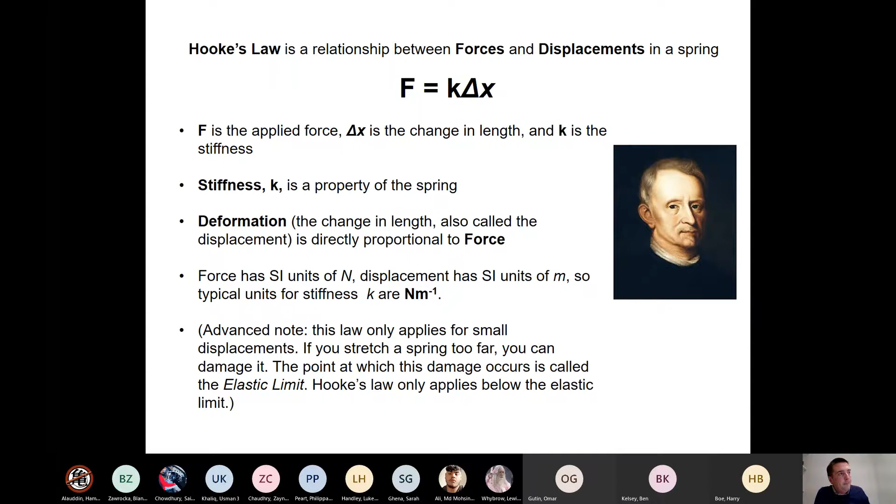So what does that actually mean? This is a slightly clunky slide visually, I acknowledge, but the idea is for every extra weight that you hang off a spring, you'll get the same amount of extension again. So when we move to W, 2W and 3W hanging off the spring, we move to delta X, 2 times delta X, and 3 times delta X extension. And that gives you a nice straight line on a graph. And in fact, the slope of that straight line can tell you the stiffness of the spring. So that's one way we can get the stiffness of the spring.

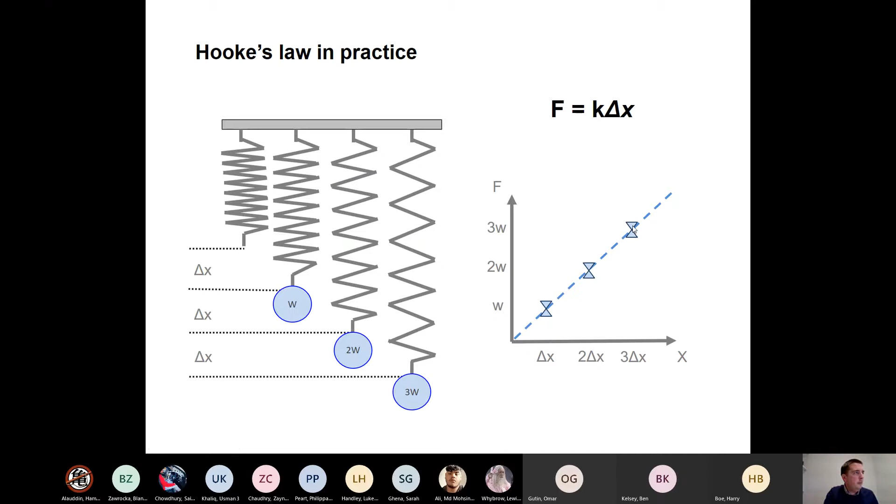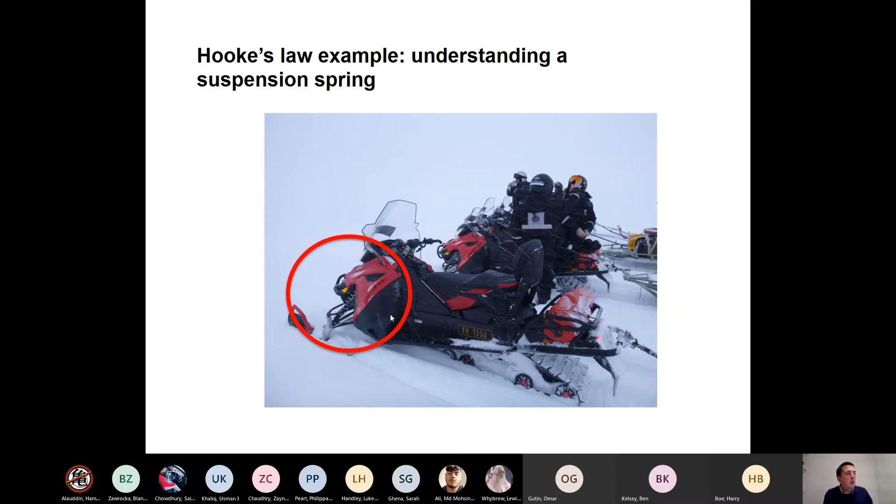So here is an example. If you look at many vehicles, they'll have springs somewhere in their suspension. This is a coil spring here with a kind of helical shape, just like we've been talking about. And as you sit on the snow scooter here or on a motorbike, or as you get into a car, those springs will compress a bit because your weight adds to the force on the spring. And we know now that the force is proportional to the change in length. So when you add some force, you're going to get a change in length.

So here is an example. And what I'm going to do is give everyone 3 minutes, let's make it 4 minutes, just to write out or have a go at answering this question. I'll just make sure I've got my camera set up so that we can look at how to answer it in 4 minutes' time.

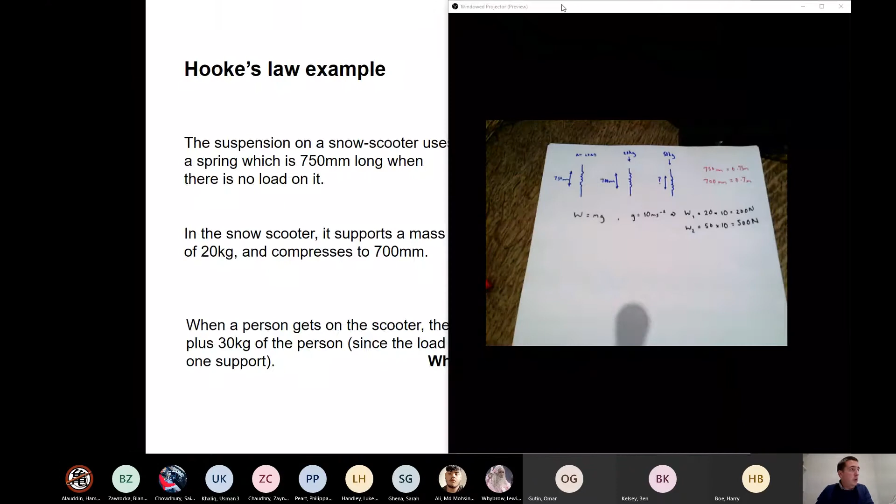Let's just work through the maths of that so everyone can make sure that we're happy. I'm going to see if I can do a split screen on this with that one and that page. I guess we'll just leave it like that. And I hope everyone can see on the right-hand side my working. Sorry, the camera, there's a light directly above, so it's casting a shadow on the page.

But I guess we'll be able to work with that. So what I've done is try and draw out a fairly simple diagram of no load: the spring is 750 millimeters long. When we've got 20 kilograms, the spring is 700 millimeters long. And when we've got 50 kilograms, we don't know what the length is, and that's the question. Just because I always do these things, I've converted millimeters into meters, and also I've taken the masses and used weight equals mass times gravity to give me a weight, which is a force.

So converting millimeters into meters, you don't have to do that. You could just work through the whole question in millimeters, but I always like to convert everything into SI units where possible. This bit you do kind of have to do, or you should do, because we're going to use Hooke's law, which is about forces, and it says that force is K times delta X.

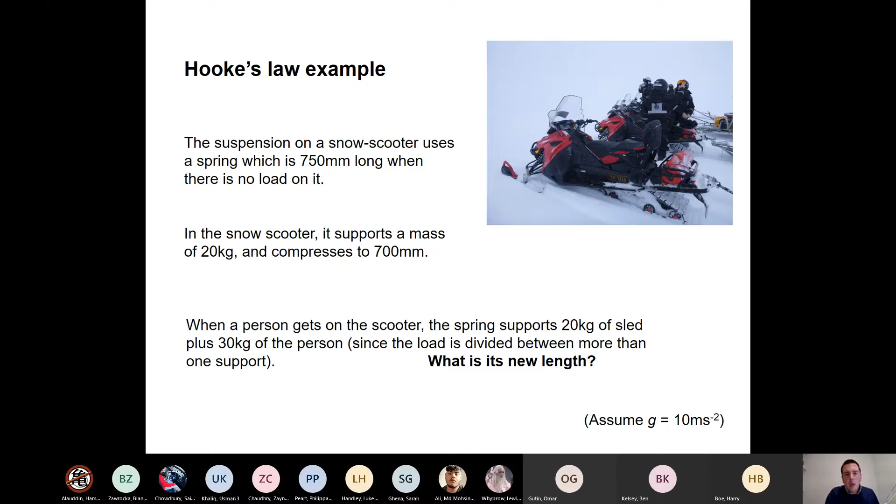What we can do next is go on and take that further. You may have been thinking, and certainly when I was at your level I thought, that's fine, but there just aren't that many springs in the world. Learning the specific way that springs work isn't going to tell me that much about engineering. But the reason it's in this particular lecture is because if you look at it in the right way, everything looks like a spring. That's what we're going to go on to now.

And instead of understanding using F equals K delta X, Hooke's law, we're going to understand it using these tools of stress and strain.

So again, I think this is something everybody intuitively understands, but it's worth stating it and being clear on it. A compressive force is a force that does some kind of squashing, so it makes an object shorter along the axis you're applying the force, and a tensile force makes an object longer. So this is a compressive force in the middle, and this is a tensile force on the right-hand side. Obviously, mostly we don't see things change their shape this dramatically. If this is made of concrete or steel, it would be a tiny amount that it compressed or extended, but nevertheless, it would compress or extend.

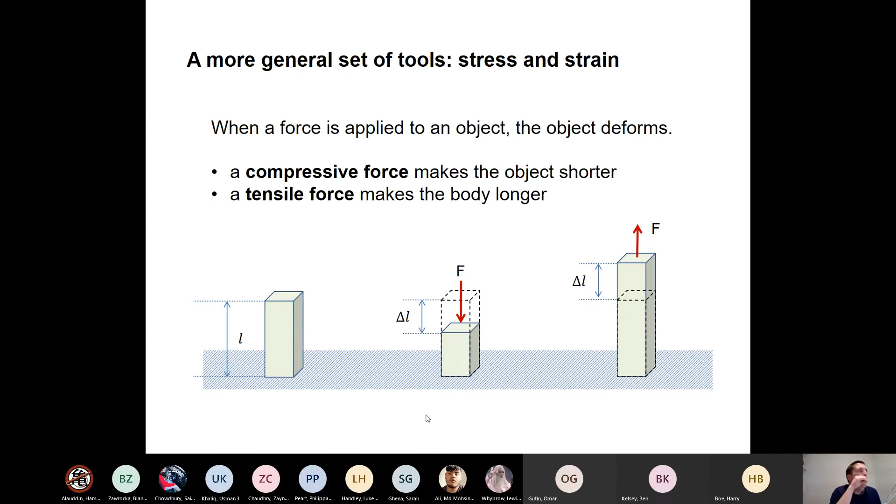So what we're going to work on in this lecture are things called direct forces. That's where we're compressing something in the obvious way along its axis. I've got some candles here which won't really compress, but what we're talking about is compressing it along its length. What I'm not going to do is any kind of bending, twisting, or applying a shear force across its length. Everything will be along the long axis of the objects we're looking at. Later on, we'll extend that to bending and twisting and other things, but for now, the most standard way of looking at something is this kind of direct force.

And what we're going to do is define this new concept that I've talked about a lot, and now we have a definition for: stress is force divided by area. Stress here is the Greek letter sigma, a lowercase sigma. F is force, which we know about already, and A is area. And what we mean is the cross-sectional area.

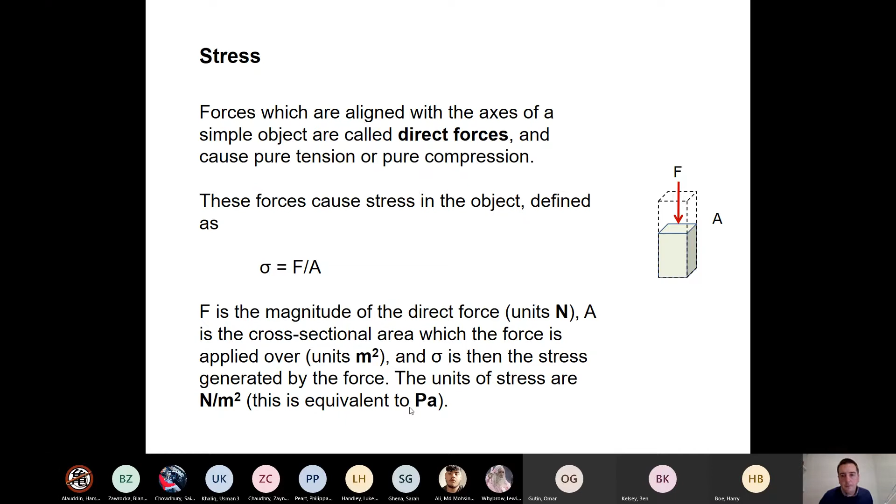So let's do an example. I'll give everyone another 3 minutes to have a look at this and think about it.

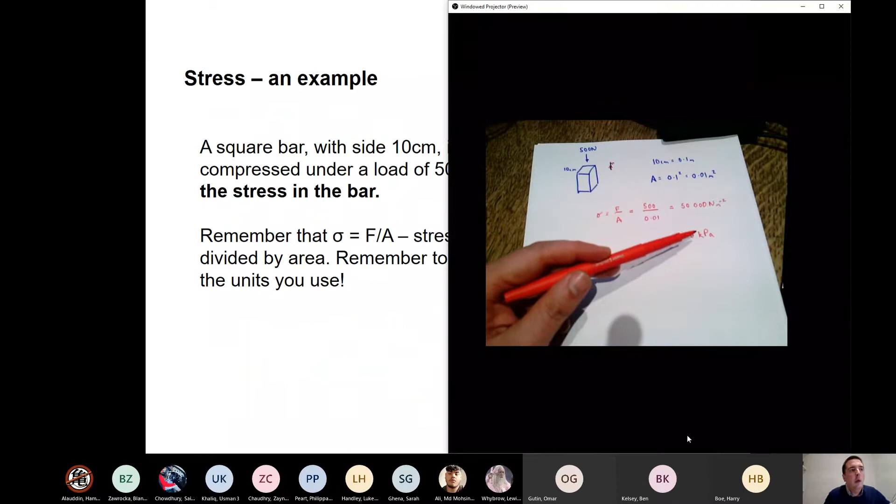Okay, all we do now is write out the equation we've seen on the last couple of slides, that stress is force over area, which here is going to be 500 divided by 0.01 square meters, and that comes out to be 50,000 newtons per square meter, which is exactly, as Luke said, 50 kilopascals. The kilo here is obviously multiplied by 1,000, just like 50 kilograms is 50,000 grams. That's the same kind of thing.

That's how stress calculations work. It won't get any more complicated than that this year, but what you'll find is you have to remember how to do that in the middle of doing other things. So although it seems fairly straightforward when you calculate the stress on its own, when you've got 3 or 4 calculations and one of them is to calculate the stress, you just need to remember to stick to the program: stress is force over area, and calculate through.

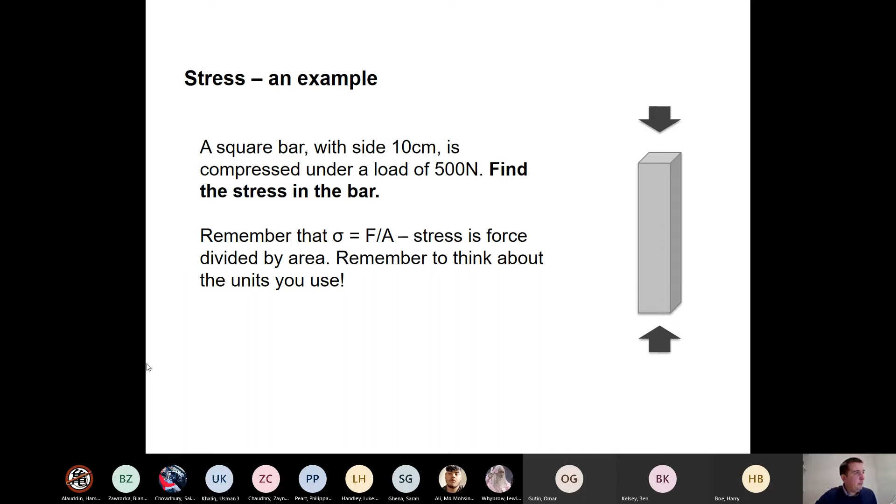I won't get you to go through this example now, but the idea here is to introduce this concept of yield strength, and that means the stress at which something will break, or it'll no longer behave in the same way. You can think of it as the point at which something's going to break, and that is a material property. So for steel, we can just say the yield strength is 250 megapascals.

What we're really saying there is incredibly versatile. We're saying as long as the stress is less, it's not going to break. And if the stress is higher than this number, it will break. And that's all we need to know. We've already accounted for the force and the dimensions, the scale of the thing, so we'll know whether something's going to break or not.

So let me very quickly work through this problem to show you the kind of thing I'd be doing. So we've got, I'll just write down the details. I'll call that W, hanging off a circular steel bar, and the steel bar has some diameter D that we don't know yet, and it's holding up 5,000 kilograms, 5 tons, and we know the yield stress.

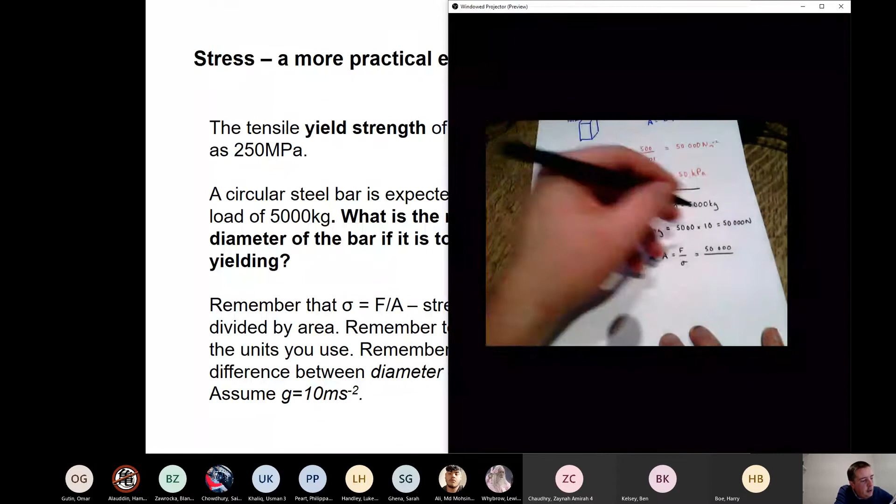And then that's going to be, we know the force is 50,000, and the stress we're interested in — well, if we just find the point at which it's just breaking, the stress is 250 megapascals, then we'll know the smallest possible diameter we can get away with. We might say, okay, let's double that diameter so we're not just at the point of breaking. But as long as we know what the limiting diameter is, we can work from there. So I'm going to put down 250 times 10 to the 6 as the stress.

And that equals, and again, this is just a calculator job. And as always, I'll keep saying over and over, do make sure you're practicing this calculator work. It's sometimes more complicated than people expect, and it comes with practice. So that's 2 times 10 to the minus 4 square meters, which is the minimum area that will support that load.

Then we need to say, okay, pi r squared — it's a circle, so the area is pi r squared — and that must be what makes up the 2 times 10 to the minus 4 square meters. Again, I'm going to go a bit quick here, but you can practice this rearranging in your own time, so that r must be 2 times 10 to the minus 4 divided by pi, all square rooted. And that's something I can put into a calculator, and that comes out to be 7.98 times 10 to the minus 3 meters.

And then finally, I have to remember that the question was actually asking for a diameter d, and d is 2 times r. And that comes out to be 16.0 times 10 to the minus 3 meters, and that's 16 millimeters, pretty close.

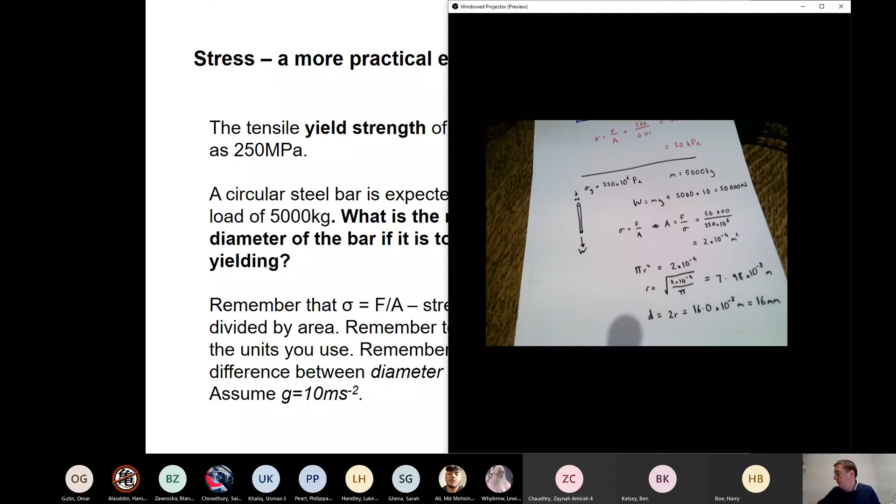So that's somewhere just smaller than the diameter of that pen I've been using — I would imagine that's about a 2 centimeter diameter. And this is a 1.6 centimeter diameter in the question, and it's able to hold up 5 tons. So it's kind of a reminder that steel has a high yield strength, and steel can support a lot of load, I suppose is what we're really learning.

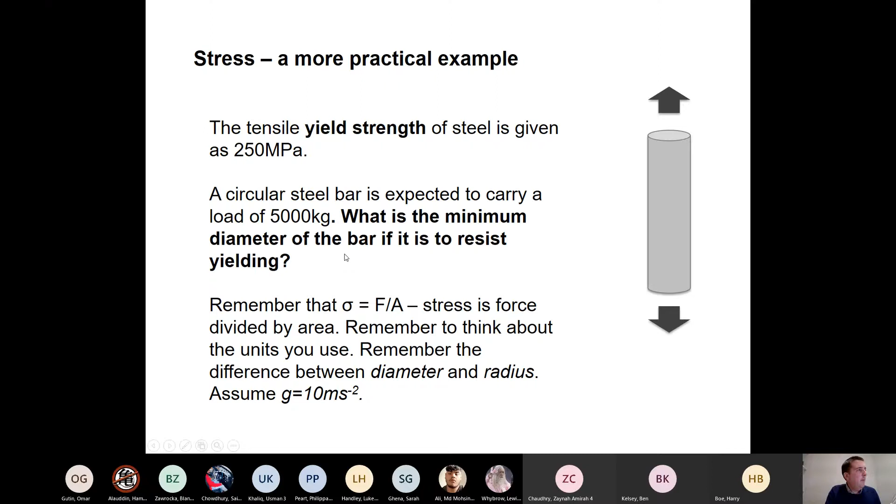One thing we'll come back and think about when we talk about fluid dynamics is pressure. And pressure has the same units as stress — it's also a force divided by an area. We tend to use pressure for something that's happening external to an object, and stress describes the internal state. They're very closely linked.

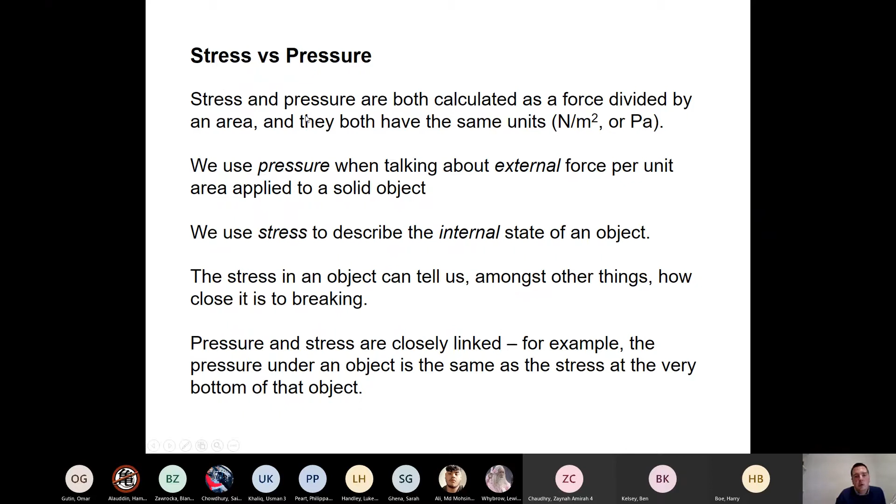So here's an example: the pressure under an object is the same as the stress at the very bottom of that object. The pressure under your foot is the same as the stress that the sole of your foot is experiencing. So I guess this slide is just a kind of side note — if you're confused by the distinction between stress and pressure, there's very little distinction between the two.

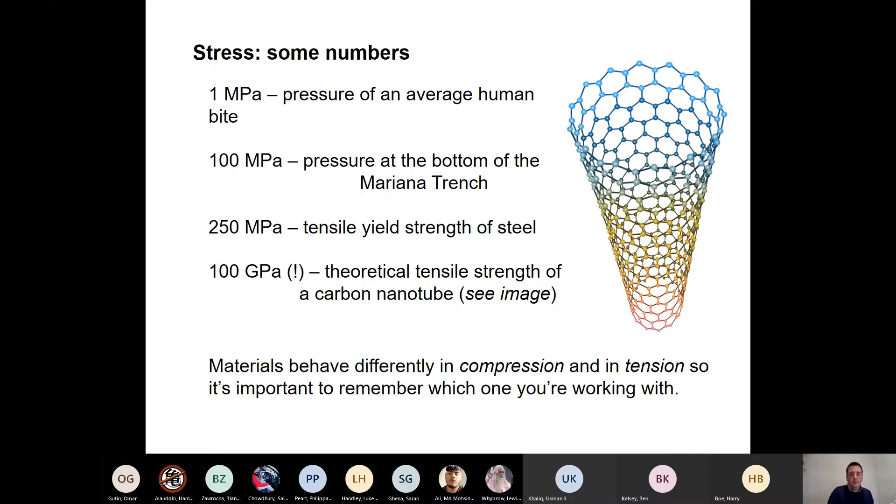So we've talked about stress. Now I want to talk about strain. When something has a stress, an internal stress, when it has a force applied to it, we've already said it changes length, and strain is a measure of that change in length. Specifically, it's delta x, the change in length, divided by x, the original length. This is a Greek letter epsilon - I'll put that in the chat as well. That's the lowercase epsilon.

We said already that stresses are typically very large numbers, strains are typically very small numbers. Things don't change their length very much at all. If I take the candle again and squash it really quite hard between my hands, it doesn't change length to any extent that we can visualize. So the strain is like 1 part in a million, or even with quite a large force, it would be 1 part in 1,000. We describe those as millistrains or microstrains.

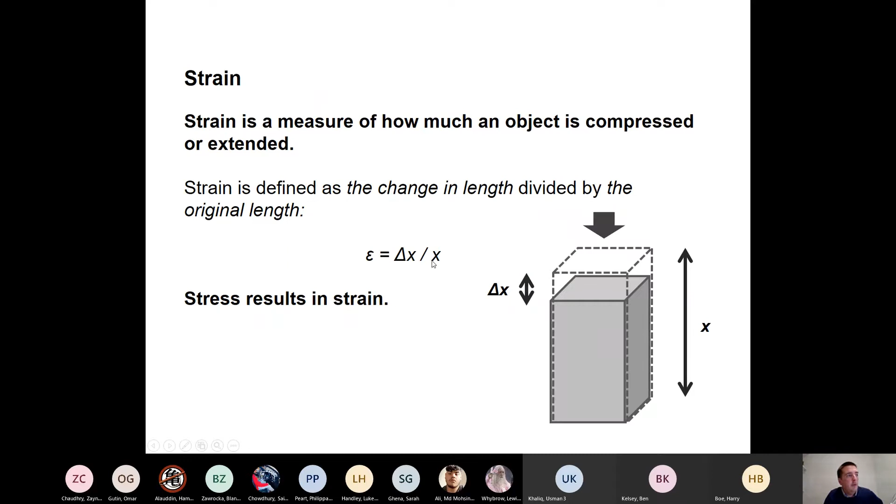The other important thing is that strain is a ratio of lengths, and it has no units. The change in length divided by the length is something in meters divided by something in meters, so it doesn't have any units in the end. We call that a dimensionless quantity. Just remember that strain is dimensionless.

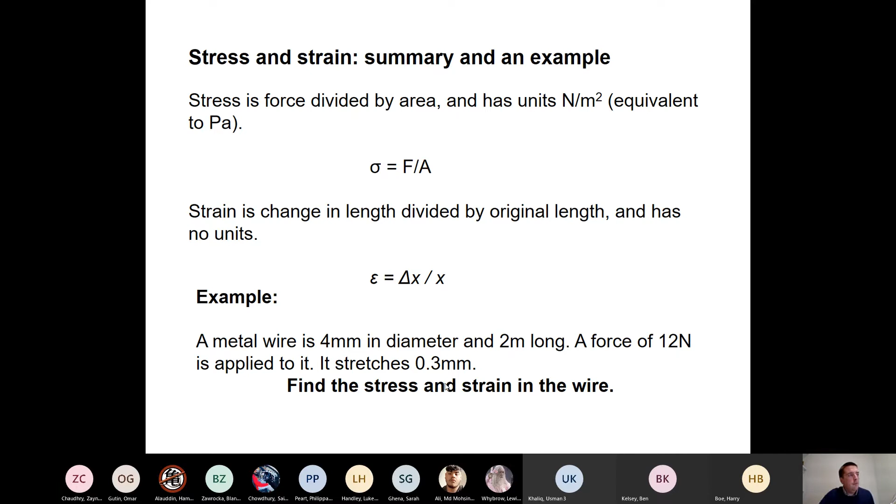So here is a kind of part-way summary. We've defined stress and we've defined strain. Again, you can do these kinds of questions about metal wires and find how much you expect something to stretch given a certain force, or how much strain there is given a certain amount of stretching. I'll leave that for people to have a go at later, because what I want to look at is this next slide, which is kind of where everything comes together.

We already said Hooke's law for springs has a force being related to a change in length. That extends to any material at all, not just springs, using stress and strain as our way of understanding things. So a stress is some constant times a strain. Remember, when you're comparing across these, stress is force over area, so it relates to force, and strain is change in length divided by the original length, so it relates here to this delta x. So there's a similarity between these two equations.

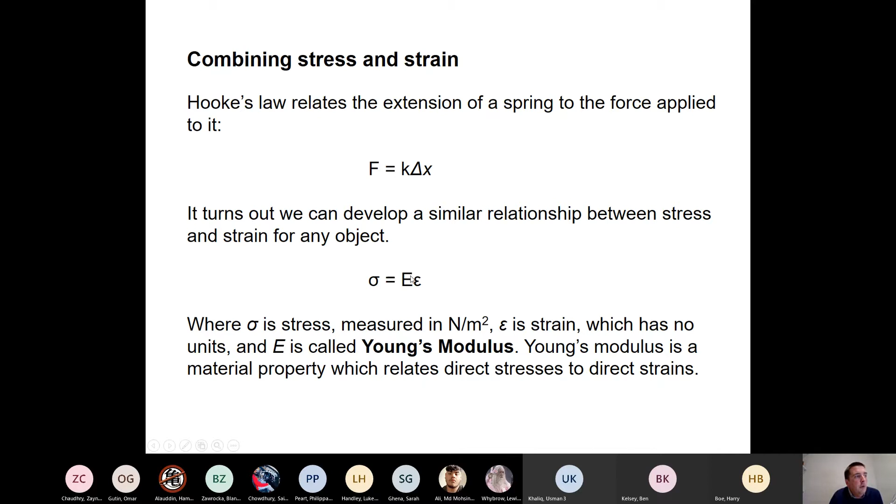The number that relates stress and strain is called Young's modulus, and it's a material property. So steel has a Young's modulus, aluminium has a Young's modulus, different woods have different Young's moduluses, for example. Because stress is measured in pascals, or newtons per square meter, and strain has no units, Young's modulus must also be in pascals, or newtons per square meter.

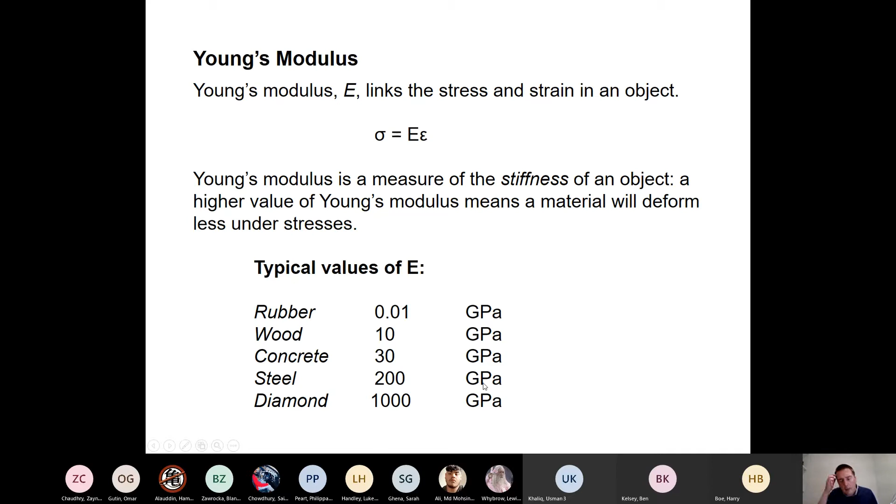Young's moduli are typically listed in gigapascals, or they're typically very large numbers, as you can see here, and they kind of relate to how hard you know something is. So rubber and spongy materials come out at, say, 0.01 gigapascals. The very hardest materials come out at hundreds or thousands of gigapascals as their Young's modulus.

Okay, so one last example in this lecture, and then we've really covered the important information. I'll give everyone 4 minutes to get started on this, and then we'll work our way through it.

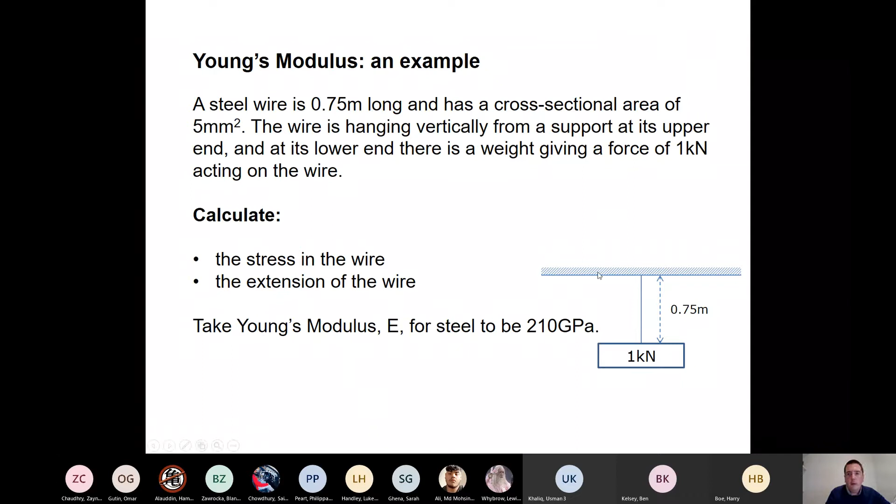One tricky thing about this question is working out what 5 square millimeters is in terms of square meters. 1 square millimeter is 1 millimeter multiplied by 1 millimeter, and you need to convert both of those millimeters into meters. When you multiply it through, you find that a square millimeter is 1 times 10 to the minus 6 square meters. That's something that can easily catch people out, it can easily catch me out too.

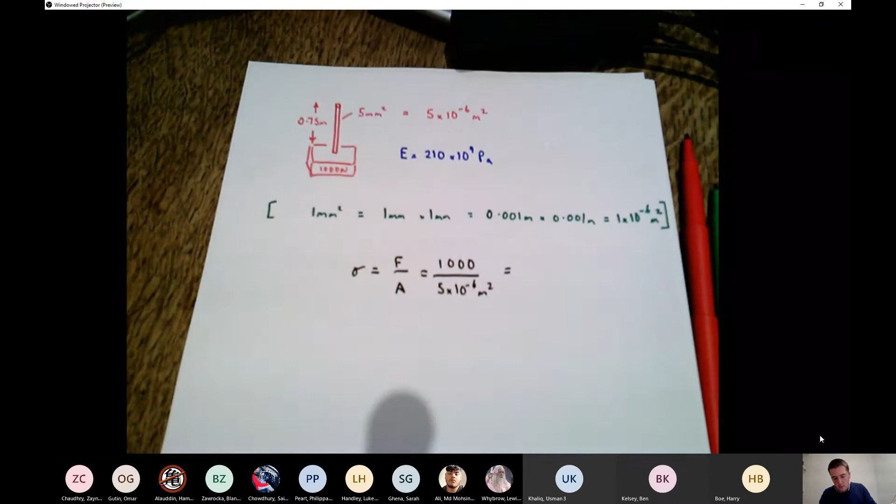So just keep that in the back of your mind for now. Now in the problem, we know a force and we know a cross-sectional area, so we can calculate the stress in the wire: force over area is 1,000 newtons divided by 5 times 10 to the minus 6 square meters, which is 200 times 10 to the 6 pascals, or 200 megapascals.

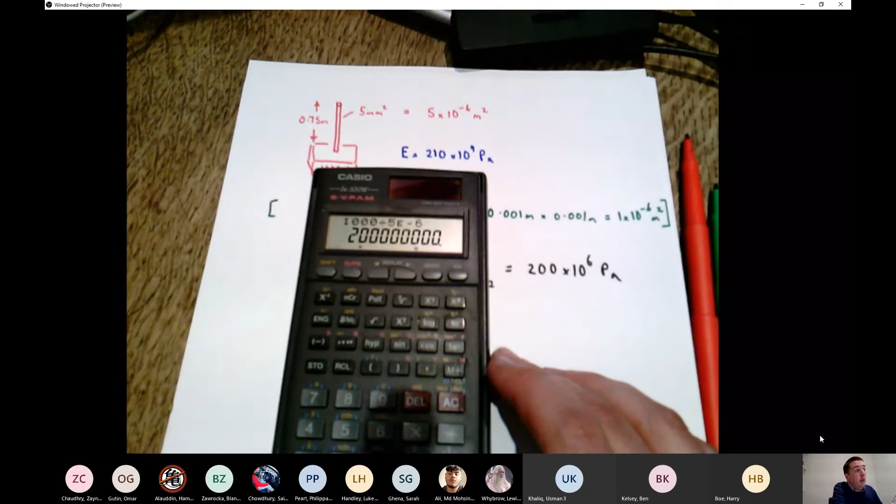One thing I'll make a quick note of: you want to get quite good at counting zeros on your calculator, or converting things into engineering notation. It's easy to misread that kind of number as 20 million, or 2 billion, 2 times 10 to the 9. Try not to make those mistakes.

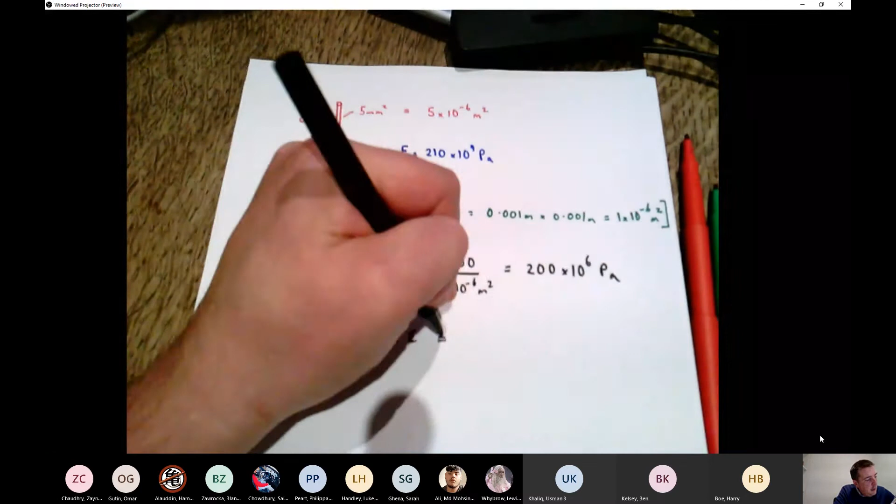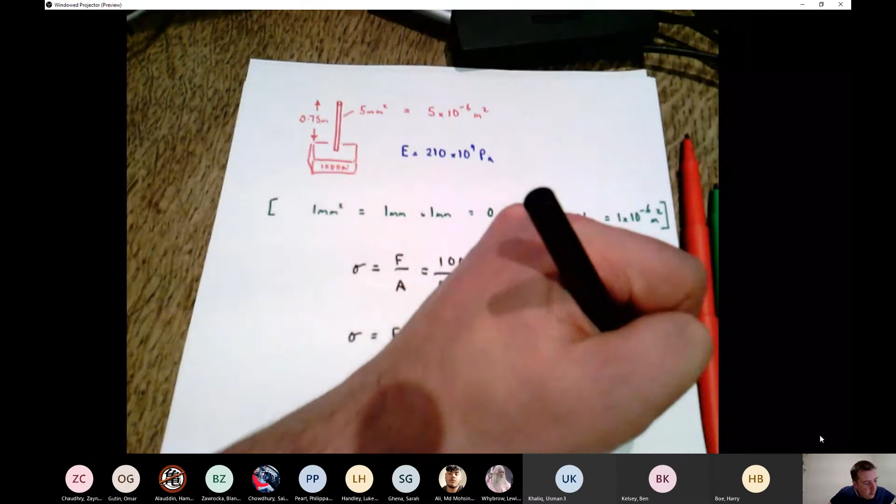So that's the stress. Now we can find the strain, because stress equals Young's modulus times strain. Therefore, strain is stress divided by Young's modulus if we rearrange the equation. That's 200 times 10 to the 6 divided by 210 times 10 to the 9, which comes out as 9.52 times 10 to the minus 4, with no units - strain is dimensionless.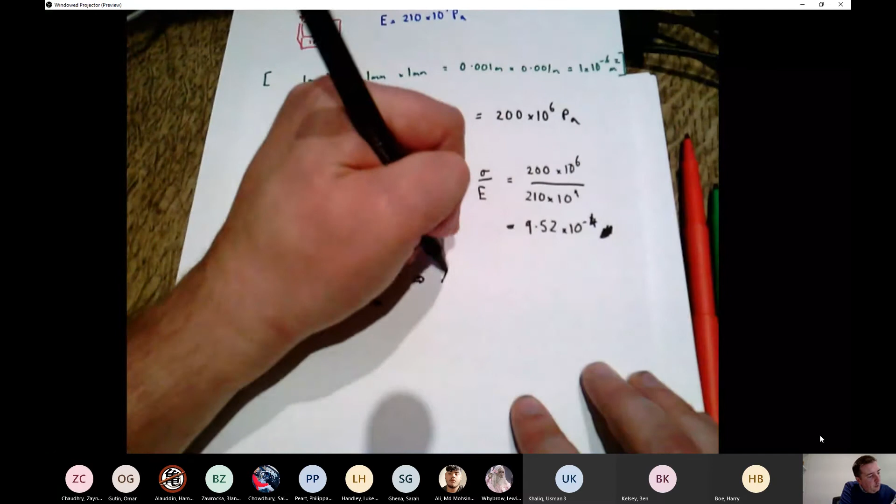Next, what we wanted in the end was our change in length, so now we need our third equation: strain is change in length divided by length. Rearranging, the change in length is the strain multiplied by the original length. That's 9.52 times 10 to the minus 4 multiplied by 0.75 meters, which equals 7.14 times 10 to the minus 4 meters, approximately equal to 0.7 millimeters.

So again, you start to see that we're talking about small numbers here. We've got 1,000 newtons, that's like the weight of a person, hanging off this very slender rope with a 5 square millimeter cross-sectional area, and that gives us an extension on nearly a meter's length of less than 1 millimeter.

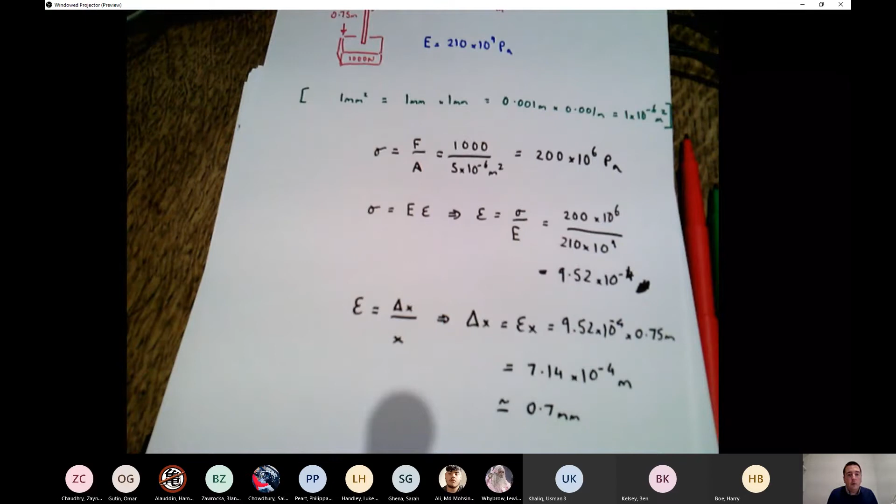All of these kinds of numbers are going to be important. As a designer, you might want to fit things together under different loads, and if you want really precise fits, you'll need to calculate how much you expect the strain to cause them to expand or contract, then make sure they fit even allowing for that expansion or contraction. This stuff is central to a lot of design.

Okay, there is a summary slide - these slides are all on Moodle. If you're going to remember one set of information from everything we've talked about in the last hour, this is what to remember: those four equations, and that they all link, or the last three in particular - the stress equation and the strain equation - can be related together because stress is related to strain.

And so often we'll work through problems where we're pulling these things together to find, for example, a change in dimension, or whether something's going to break under a given load.

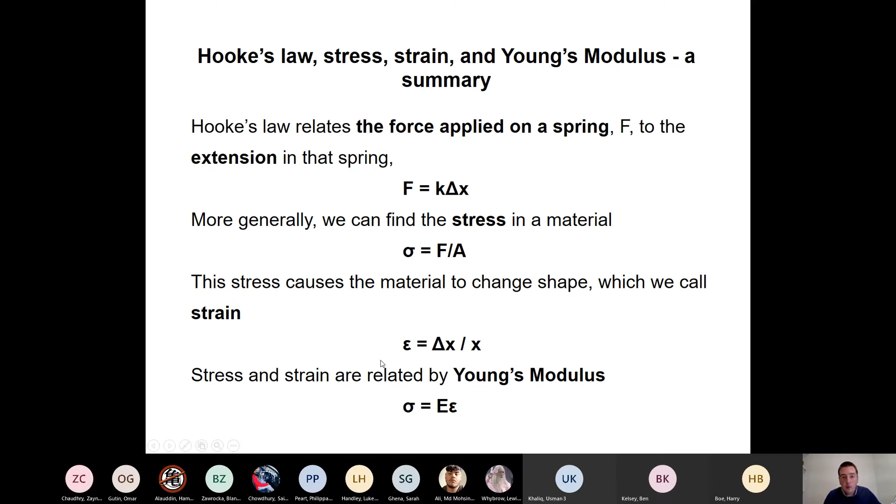This is now the last slide of this lecture. You can now see, I hope, that the kinds of things we've been talking about today would give you some understanding of what's happening in this problem on the bridge. You'd have an idea already of what the load on this girder is, and you'd also know its cross-sectional area - it's been designed to tolerate a certain stress. As it's had this saltwater embrittlement over 50 years, essentially the yield stress has gone down and down and down until it fell below the design stress, and then it broke. So already we're starting to get a good sense of what's going on here, what kind of tools we need to understand the problem.

And as we saw right at the start, you've all got the kinds of design ideas, design brains to start putting together solutions as well to that. And then one more thing - we'll come on and look at finite element analysis, particularly you'll do a whole module around it in second year, and that's where we can use a computer to find stresses in much more complicated geometries.

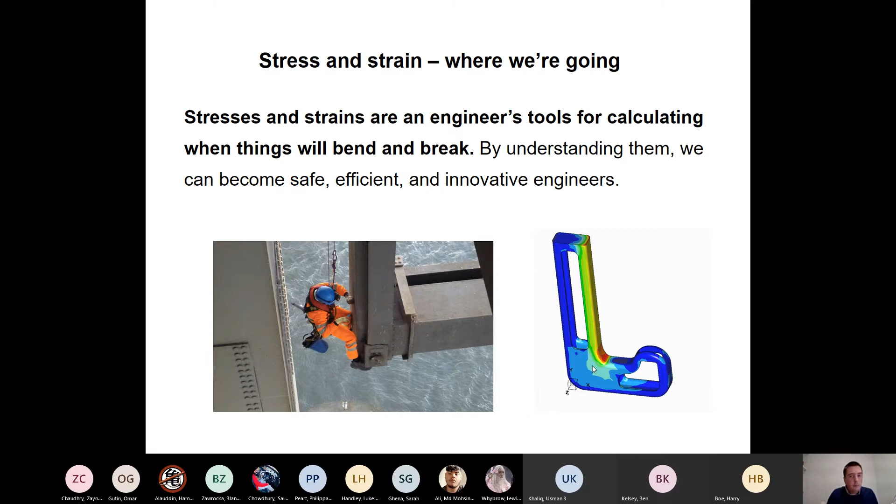Okay, that's nearly completed in an hour. We ended up taking just a bit over an hour. And that is everything that we need to know about stress and strain now.

Again, when you're doing some revision of this topic this week, you might just want to look at some past papers which are linked on the Moodle site, and those will show you the kinds of ways that stress and strain come up in the exam. But it's not particularly more than what we've covered in that lecture and in some of the worked examples from that lecture. Any questions for now?

Good question from Luke. When's your first exam? The good news is you've got one exam in this module and it's in May. So what I'm definitely not saying is forget about everything until the night before the exam, but you don't need to be worrying about exams quite yet.

I would say take time to get familiar with all the material. We'll cover most of the examinable content in semester one, so you'll then have time to revise it and work with it and really get prepared for the exam. The specific date of the exam will be published, I would think, around March. We don't do the exam timetables a very long way in advance because it's too subject to change, as this year has proven to all of us.

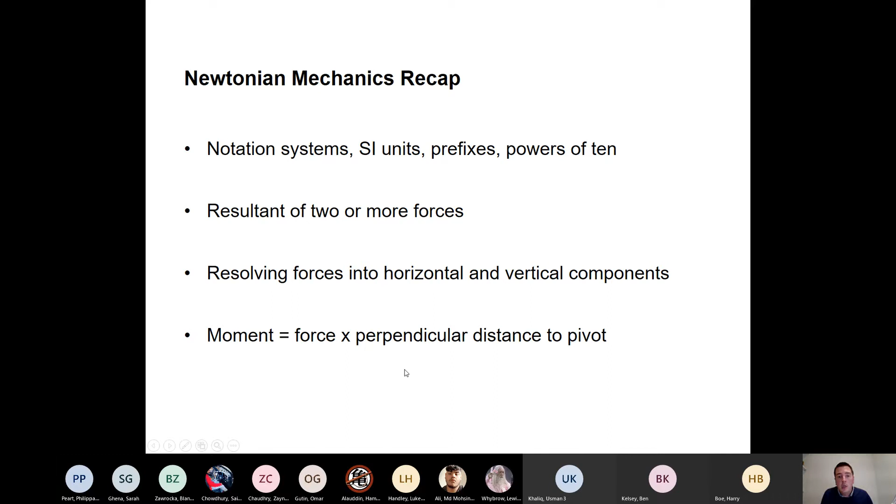And then we also talked about Newton's laws. Again, I don't want this to be a module about memorizing things, but it might just be a good idea to try and memorize Newton's laws because they're so fundamental to engineering.

If the net force acting on something, the resultant force, is 0, then there'll be 0 acceleration. We say its velocity will remain constant. Usually, in the context we're dealing with, it will almost certainly mean it's staying still. And we can flip that around: if something is staying still, that means the forces acting on it must sum to 0.

Newton's first law here is really what we use throughout this module. Newton's second law we won't use quite so much, but it's still extremely important, and it's kind of the counterpart. If the forces don't sum to 0, then we'll have acceleration, defined by F equals ma - force is mass times acceleration. And then Newton's third law: for every action there is an equal and opposite reaction. That's actually a more intuitively complicated law, and we don't use it so directly in this module.

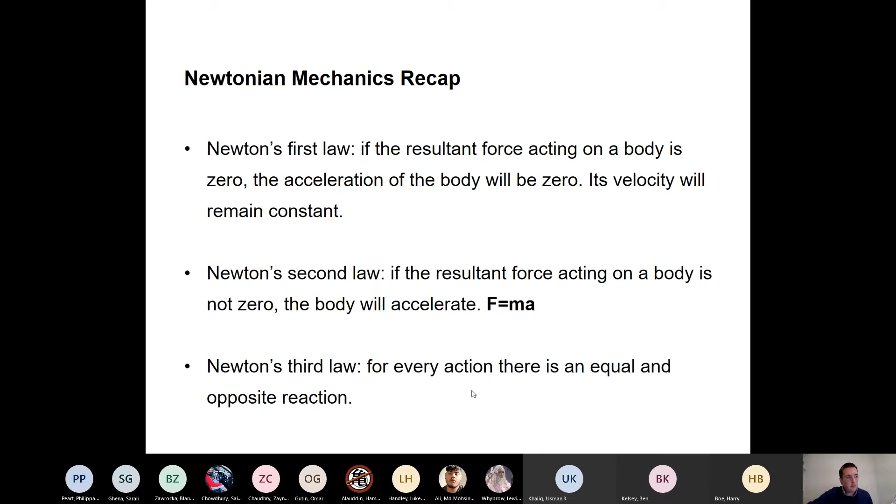Okay, here's a question. The speed of light is 3 times 10 to the 8 meters per second. 1 light year is the distance traveled by light in a year. How far is a light nanosecond?

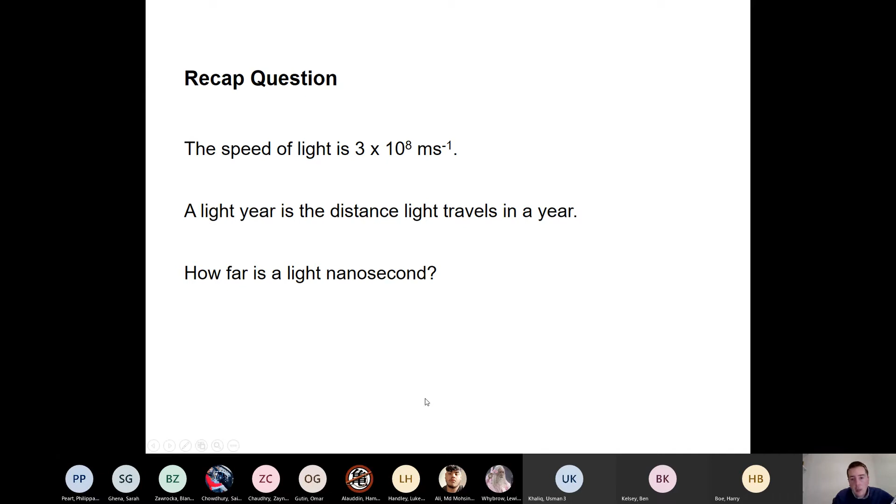Everyone can have a go at this, I think. There's the problem in a different context. So 1 light nanosecond is going to be the distance traveled by light in a nanosecond.

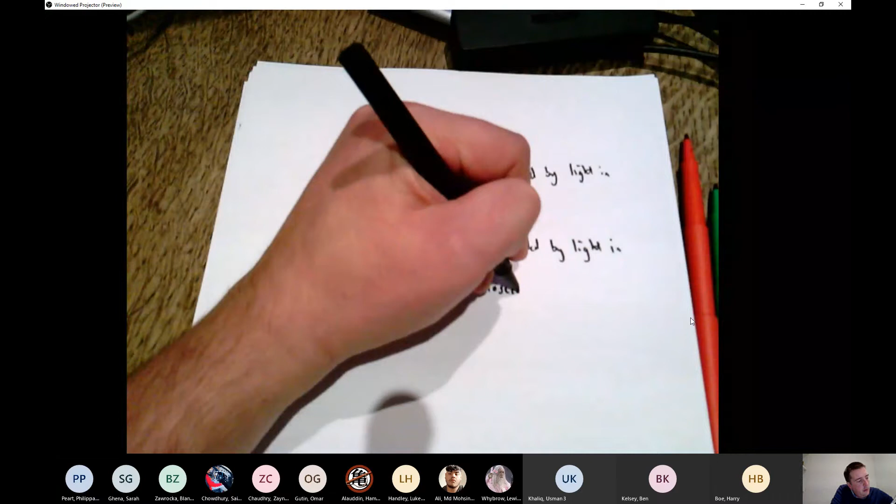If a light year is the distance traveled by light in a year, a light nanosecond, all we changed is the unit of time from a year to a nanosecond, so we can work out that it's the distance traveled by light in a nanosecond. Speed, we know, is measured in meters per second, so that means it's distance divided by time.

Just call this speed rather than using letters for it. So I can say, okay, well, distance, rearranging the equation, is going to be speed multiplied by time. In this case, our speed is 3 times 10 to the 8 meters per second, and our time is 1 nanosecond, and for that we need to remember what a nanosecond is, or what the nano prefix means - that's 1 times 10 to the minus 9 seconds. When you multiply that through, you'll get that that equals 0.3 meters. So in 1 nanosecond, light travels 0.3 meters.

That might seem slightly unconnected to other things we've been doing - we haven't really been talking about the speed of light or anything like that. But the reason I want to talk about it is because, first of all, we're looking at units. We said speed is measured in meters per second, so it must be a distance divided by a time. That's the kind of thing we've been doing a lot of, thinking of how units can tell us something about equations or vice versa, and that's called dimensional analysis.

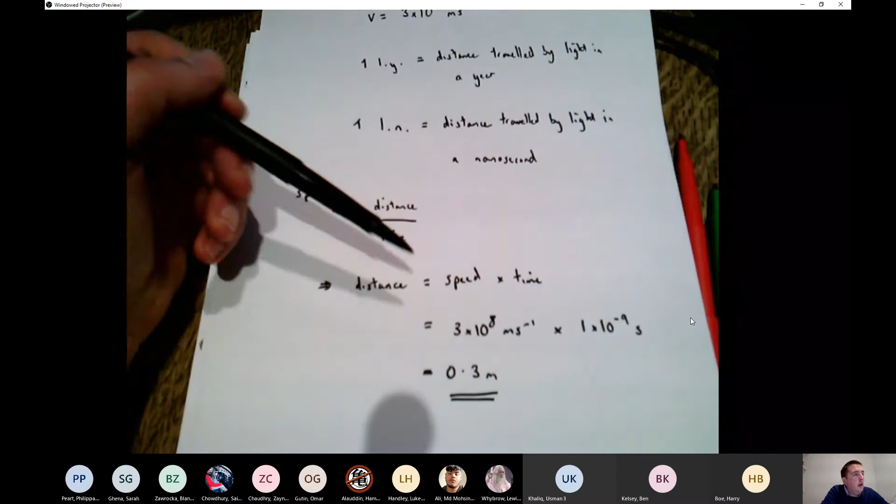And then the second thing we've had to do is remember what a nanosecond is, and to be able to write down nano is 10 to the minus 9 seconds. Also just continually working through, starting with an equation we know or can work out, and rearranging to find something unknown. So all these things that seem unlinked are actually bringing together similar engineering tools.

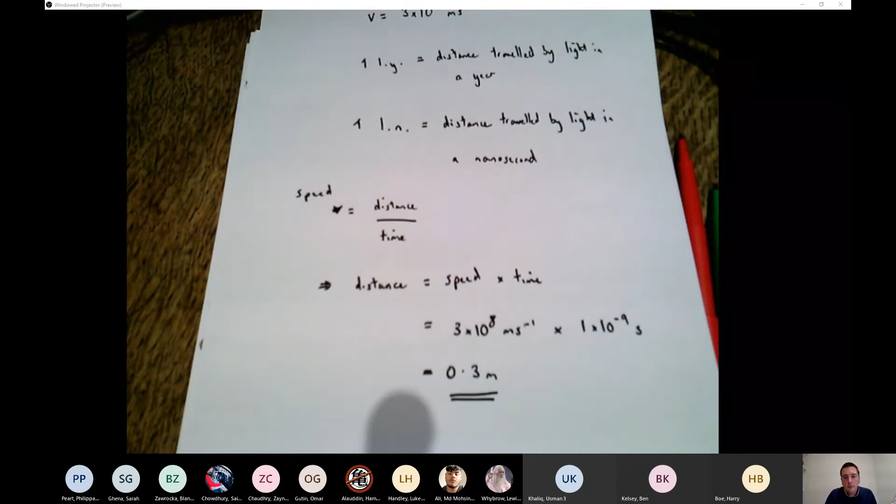Okay, let's go back and think about things slightly more related to what we have been talking about. So we're going to want to take these ideas of forces and of stresses and strains and apply them to real things that we might build or make. One thing we'll need to know is how those forces turn up in the things we're working with - and the answer is that everything is supported in some way, and forces get transmitted through supports.

One thing to have in mind quite a lot here is the work you're doing in Fusion as well. I guess at the moment you might still be doing part modeling stuff with Barney, but when you get into putting together joints in Fusion, you'll see that you can do things like a revolute joint or a pin joint - there are about 7 different kinds of joint you can specify, and that relates to some of the stuff we're talking about here. So do remember that these mathematical ideas also come through in CAD as kind of spatial ideas, and that's linking the physical and the mathematical together.

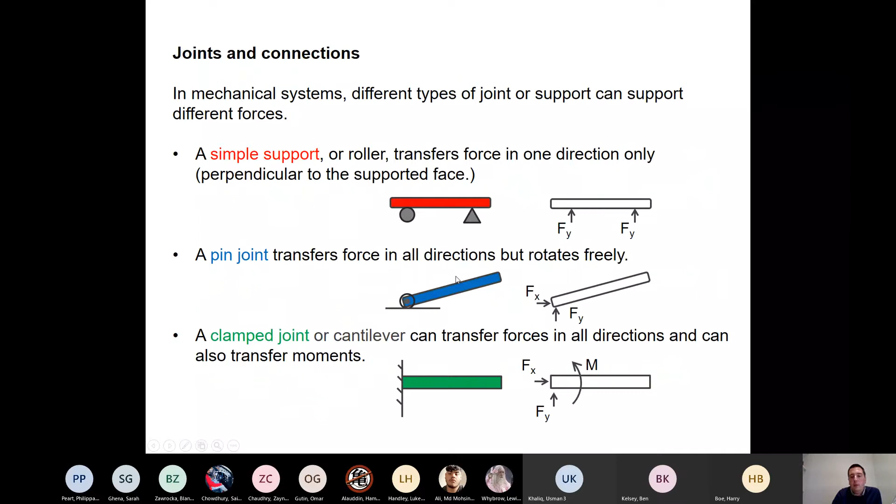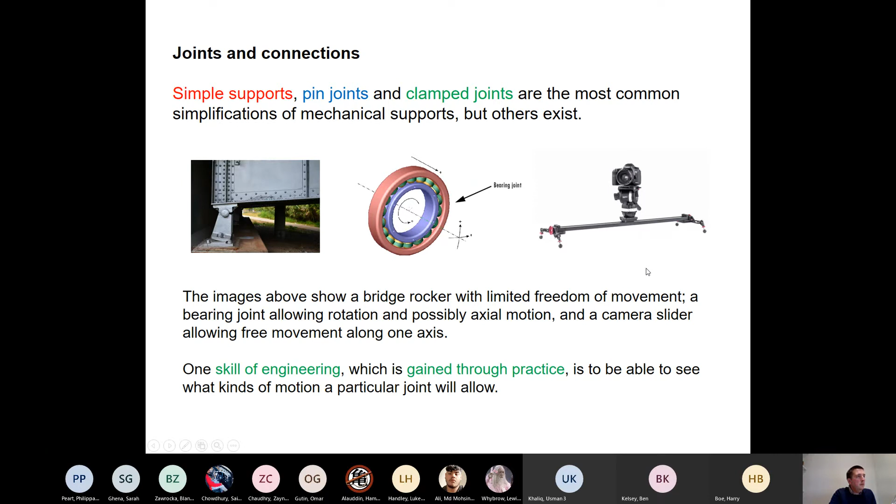So this is kind of what we've been saying. If a support prevents you moving in a certain direction, that's another way of saying it can provide a force in that direction. So these simple supports here prevent the red bar from moving downwards. That's the same as saying they push upwards.

This pin support prevents the blue bar from moving its origin point to the left or down. That's the same as saying there's a horizontal force and a vertical force available there. And similarly, we've already said this clamped joint stops three kinds of motion, and so it provides three kinds of force.

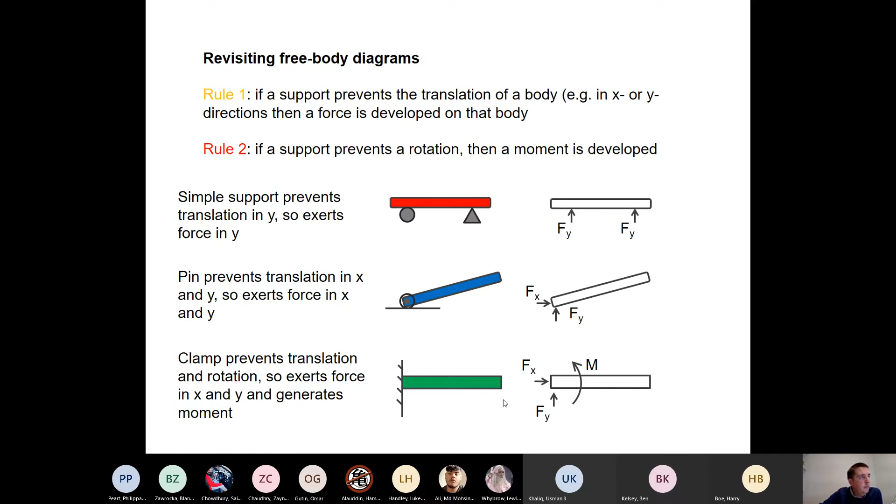And then that's all useful because we know this principle of equilibrium that we've talked about already, that the forces acting on something, if it's staying still, have to add up to zero. Well, that's good because we can write down some forces acting on things now and use that to add up to zero. Similarly, the moments acting on something have to add to zero if it's staying still. And again, we can use that to write down an equation and we can start to find some unknowns.

I just want to bring up one more thing now about weight. We've already used weight is mass times gravity a few times. I hope people have started to get a good feel for that. We'll use it a lot more, so you'll get used to it in the end.

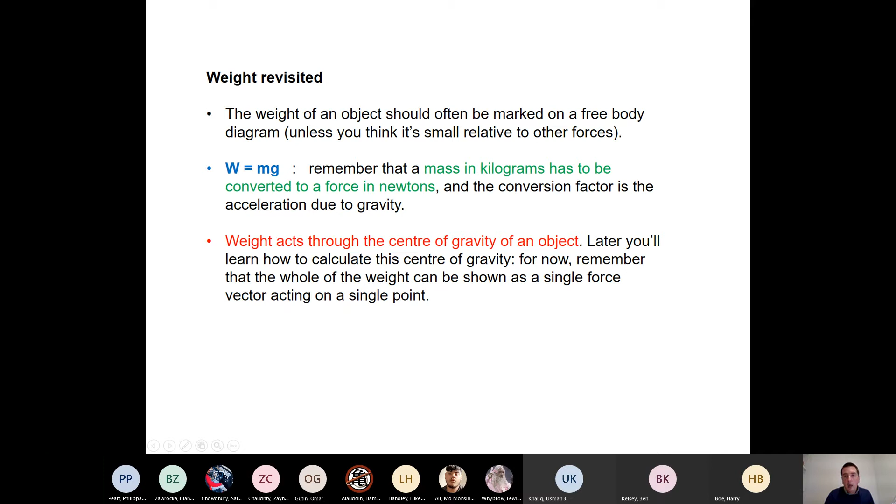But this is an important point, that weight acts through the center of gravity of an object. We can calculate that center of gravity, but usually it's kind of obvious it's in the middle of the object, certainly for simple shapes. For example, if I look at the candle, the center of gravity should be about the point at which it balances. It's in the middle of the candle. And that's something that intuitively people just know. But it means that we can mark an arrow for the weight wherever we think that center is. And that'll help us to start marking up our diagrams even more.

So here is an example that I want people to have a go at. And we'll leave 7 minutes for this. It's 23 minutes past on my clock at the moment, so we'll come back and look at it at half past. And at that stage, we'll be nearly done.

I'd like everyone to start by drawing a diagram, marking on as many forces as they can based on some of the things we've just been talking about, and then seeing if you can write down equations which would help us work out some of the forces we don't know.

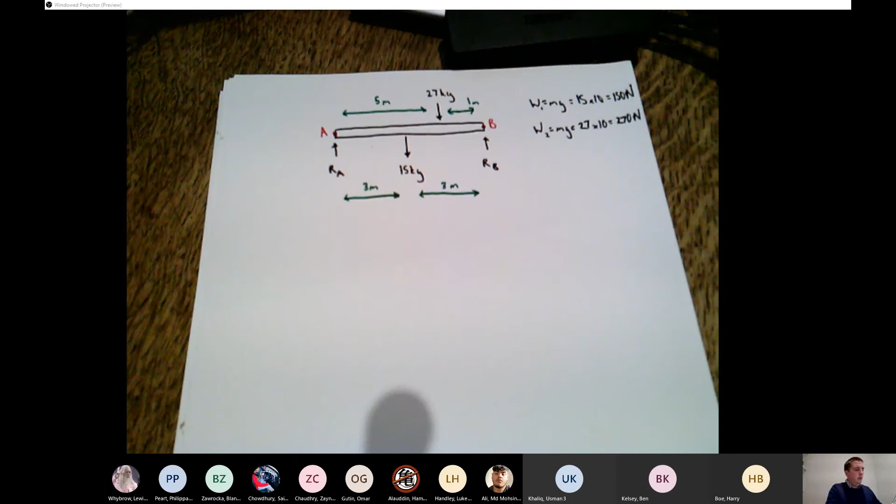So here's my diagram. I've tried to mark on lengths where I can. The weight of the beam itself is 15 kilograms, which I've converted as 150 newtons, acting in the middle of the beam. That's the idea of a center of mass, so the center of mass is in the center of the beam. The beam is 6 meters long, so that's 3 meters from either end.

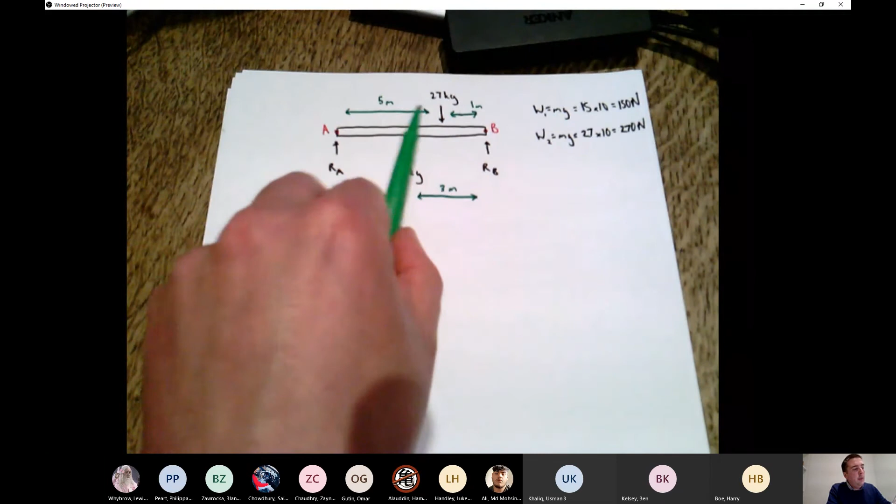There's also this other load, something resting on the beam, 5 meters from one end, 1 meter from the other. And these are the two unknown forces at the supports, which we said can push upwards, so we'll mark on forces acting upwards there and there.

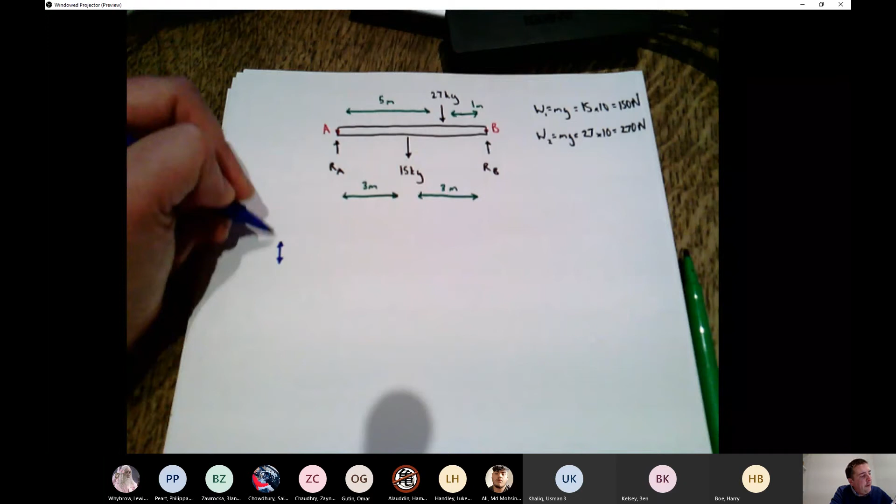If we think about equilibrium, one of the things we're going to do a lot is say the forces acting upwards must equal the forces acting downwards. I'll use this double-headed arrow up and down to indicate that. So the forces acting upwards are RA and RB on my diagram, which is a free body diagram of the kind we talked about last time.

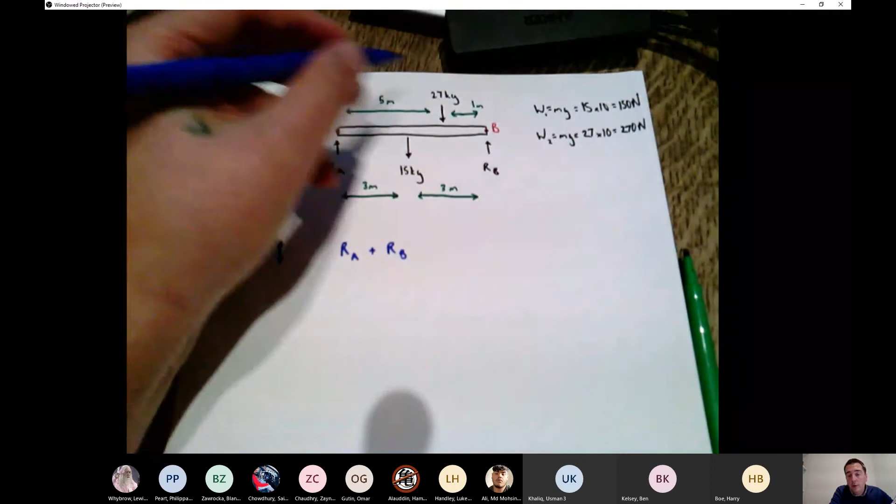And the forces acting downwards are 150 plus 270, this force and this force, the two weights marked on the diagram. So that comes to 420 newtons.

We've got two unknowns here and only one equation, so we need another equation. We might think about forces acting sideways, but there are no forces acting sideways, so I can mark that on as well. This is horizontal equilibrium, no forces.

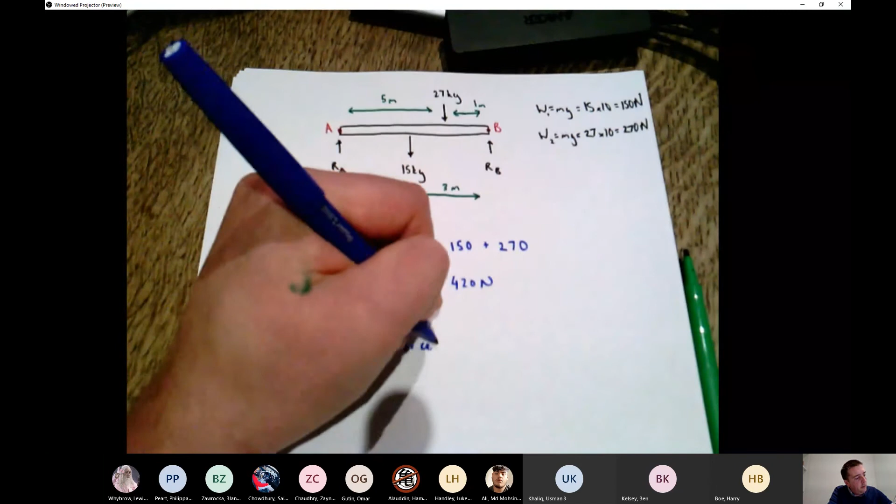I just put it in brackets to indicate we're not really using that, but we thought about it as a possibility. So the third thing we're going to use at each stage is moments. I'm going to take moments about point A and say the whole thing isn't rotating about A, so there has to be moment equilibrium about that point.

What I'll do is go along the beam from A, accounting for every force and the distance from A that force acts. So I'll get 150 times 3 meters plus 270 times 5 meters minus RB times 6 meters equals 0.

There are 4 forces here. This force, the reaction at A, goes straight through A, and so it doesn't turn up when I'm looking at the moment calculation about A. That's a force that goes through the pivot, so it doesn't contribute to the moment.

We touched on some of that when talking about moments last time, but that's something that takes a bit of thought and practice with examples like this to really get comfortable with.

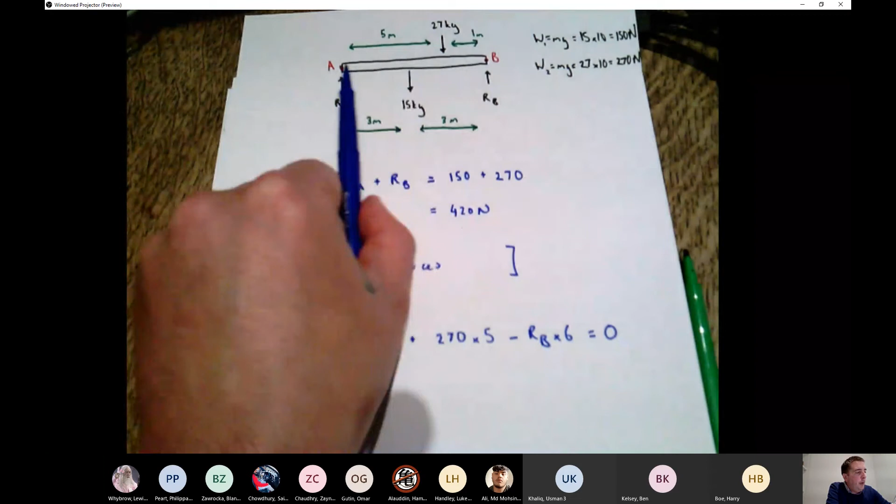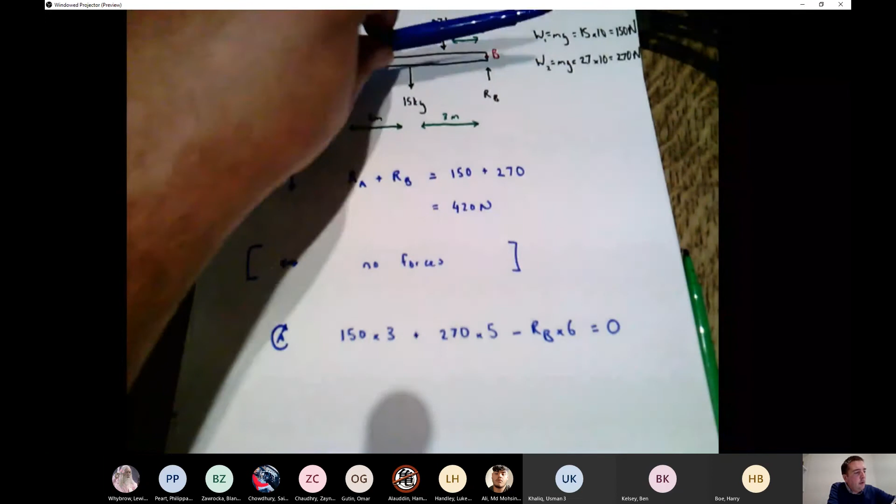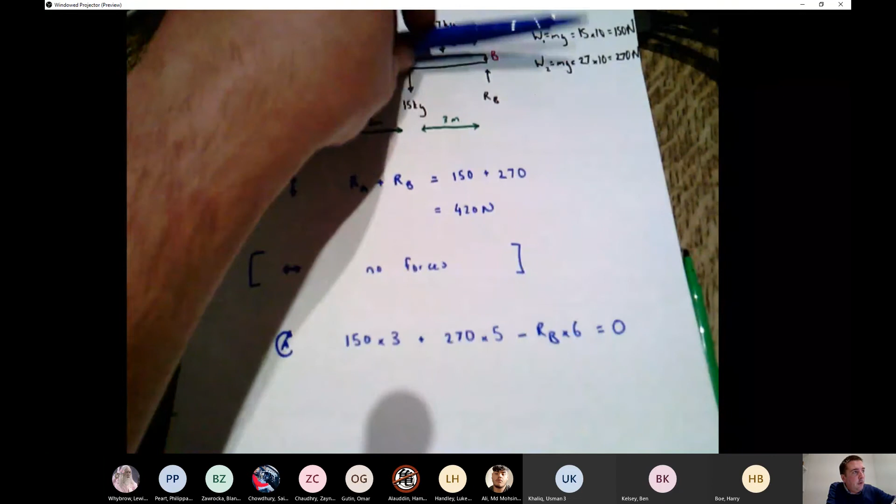This force here is 150 newtons, 3 meters away from the pivot, accounted for there. 27 kilograms is 270 newtons, 5 meters away from the pivot, accounted for there. Those are both acting clockwise, tending to turn the beam this way around A. But the reaction force here is pushing upwards, so it's turning the beam anti-clockwise, and so I've given it a negative sign here.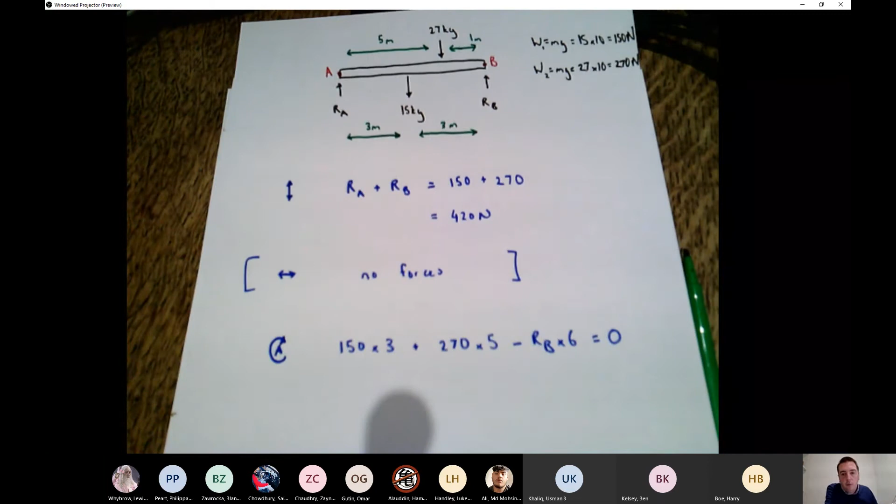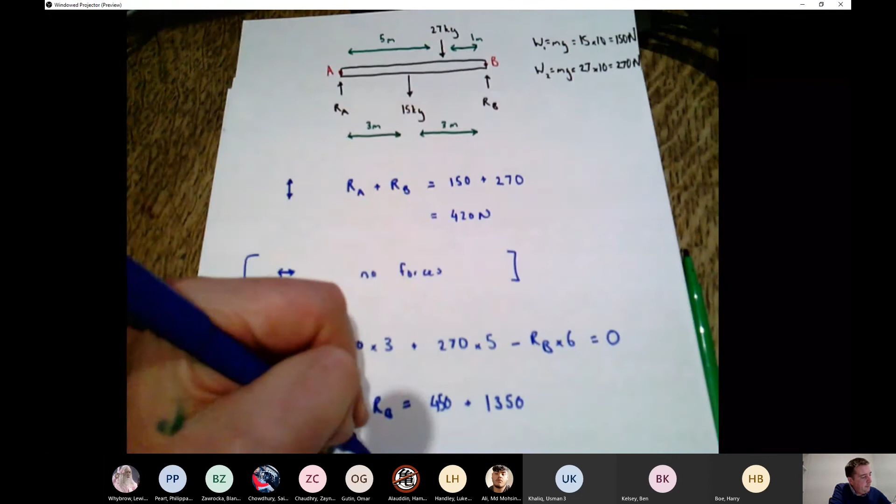All of those moments must sum to 0 because the whole beam isn't rotating. So we can rearrange this: 6 times RB is 450 plus 5 times 270 is 1,350, which equals 1,800 Newton meters, and therefore RB is 1,800 divided by 6, which is 300 newtons.

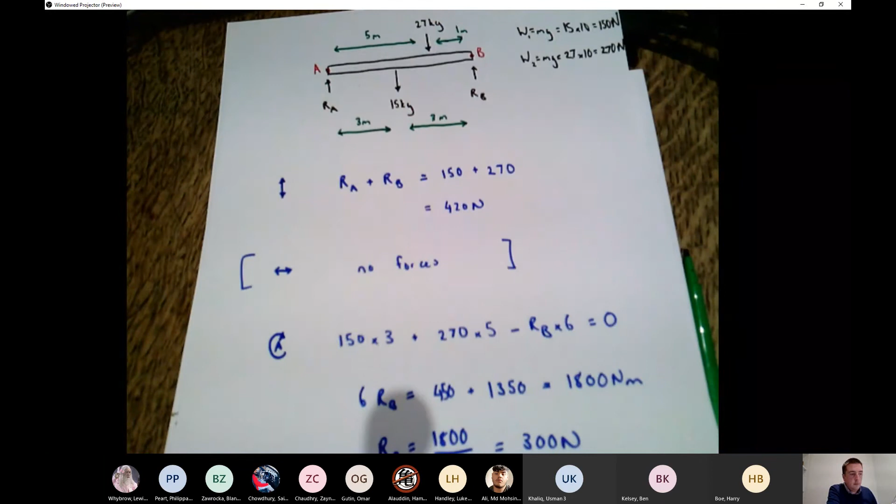If we jump down, we know that RA plus RB equals 420 newtons, and RB equals 300 newtons. So RA plus 300 equals 420, and therefore RA equals 120 newtons. And those are our two answers.

Luke, is that what you got?

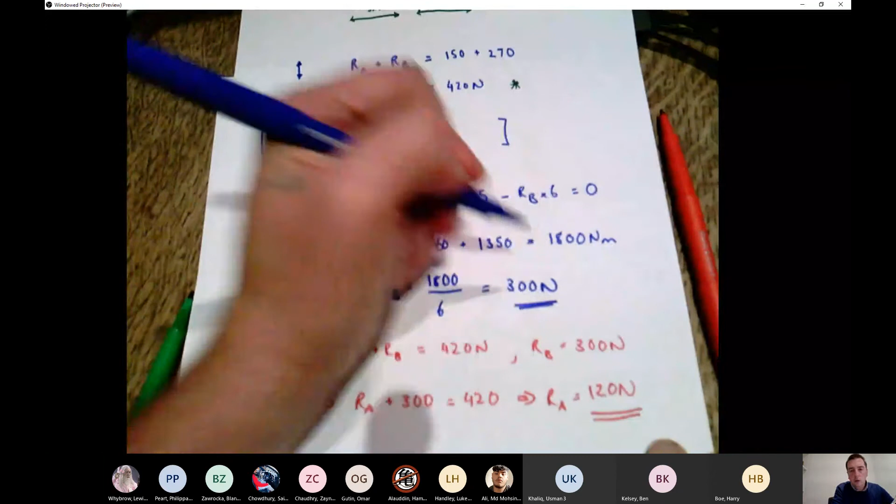I'm not seeing an answer in the chat, so I'm going to... cool, so that is exactly right. Fine to leave it in terms of G, and then you would get, I guess, 30 times G and 12 times G, 30 kilograms equivalent and 12 kilograms equivalent.

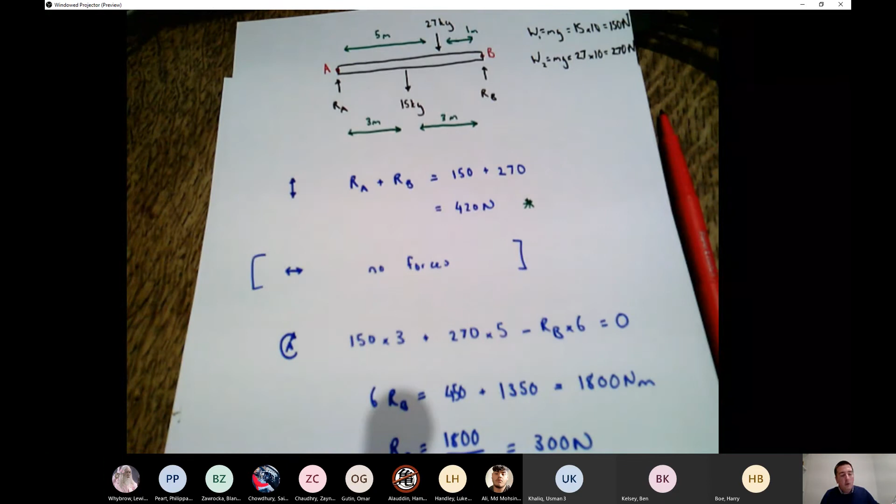Those kinds of questions turn up a lot, and it's always the same steps, the ones I put in the chat. Draw the diagram, mark everything up as well as you can, make a note of what your unknown forces are, use vertical equilibrium, use horizontal equilibrium, and use moment equilibrium to write down as many equations as you need, then solve those equations to find your unknowns, which in this case were the two reaction forces, RB and RA.

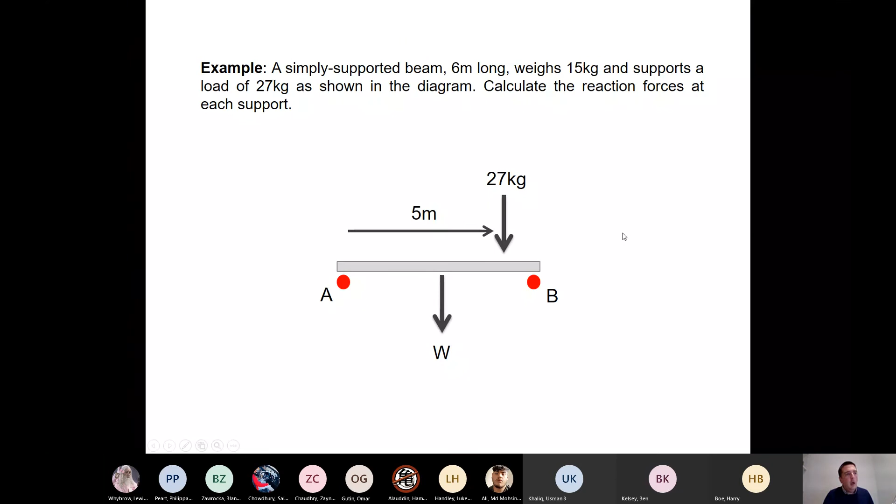Okay, we're nearly done with new content for today. There's another example here I'm going to go through. Again, it's all on Moodle. You can see my worked solutions already on Moodle. But I do just want to bring up... I'm just drawing out my diagram here.

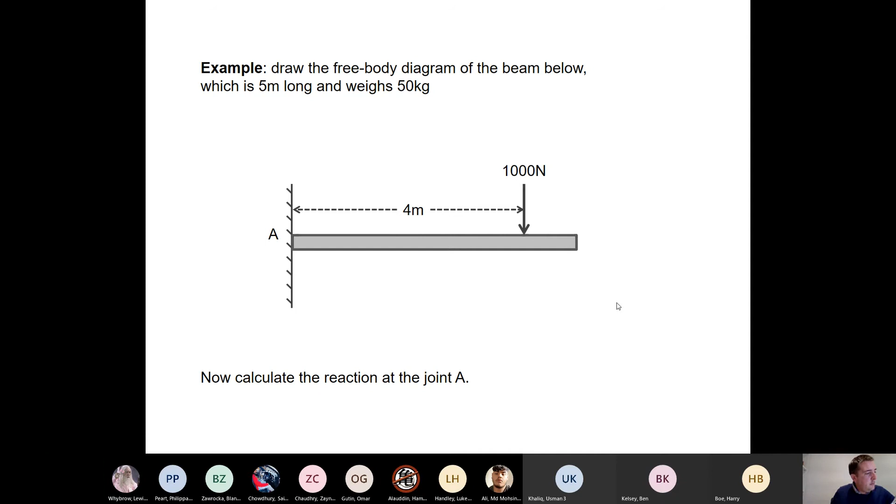I'll reload up the visualizer. This is one of those ones where it's a clamped joint at the wall. The beam is fixed over here, and that means there can be a vertical unknown force here, a horizontal unknown force here, and also an unknown moment here. So this is now the diagram that you have to start with, and then work out what all three of those unknowns are to solve that particular problem.

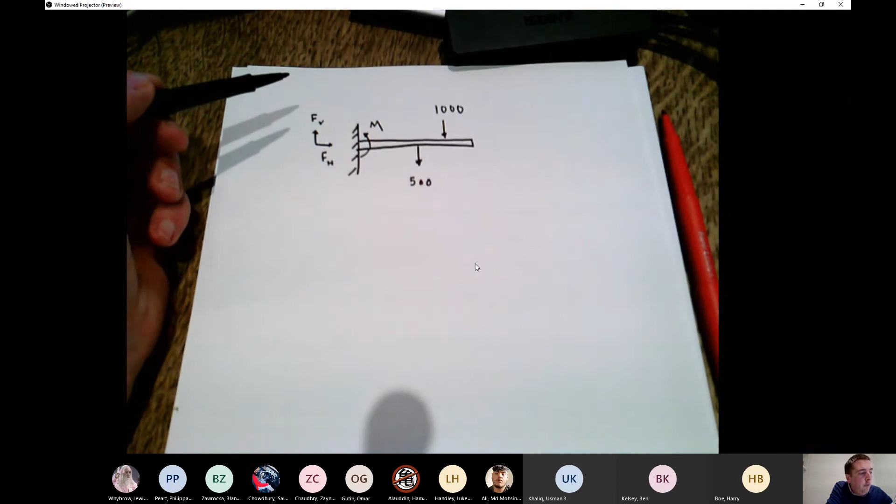Just a couple of other things to think about. If there are only two forces acting and an object is in equilibrium, then those two forces must be equal and opposite and in the same direction, along the same line. That can sometimes be a useful thing to remember.

This one here is a bit more complicated, to do with if there are three forces acting on an object. We won't use that directly, but again, it's just a way of remembering that all of this is linked to the maths of geometry, I suppose.

And then there's another question there. My sense is we've probably done enough worked examples now that people are starting to feel it, so I won't go through this, but I'm happy to go through that to start next week if people want to flag that up.

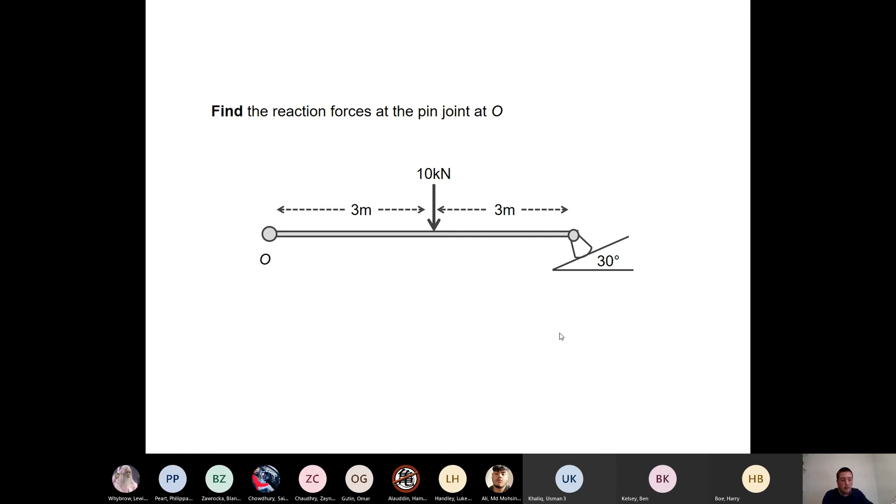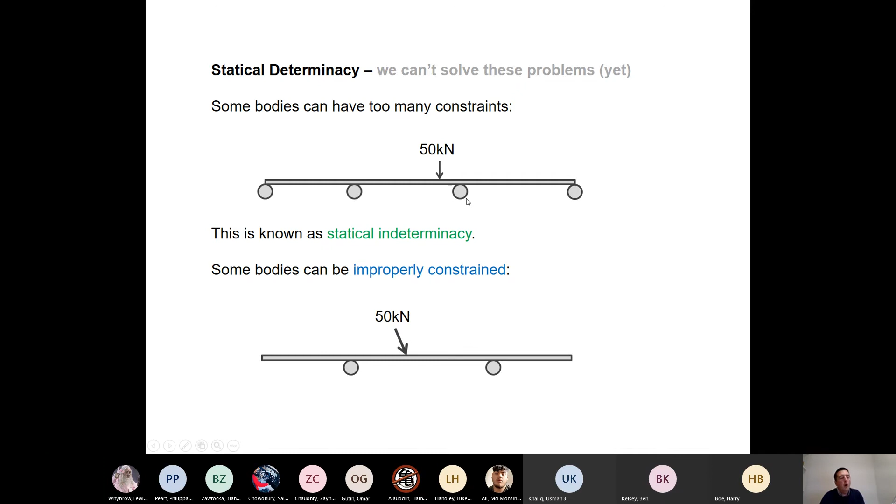And that's why over 3 years, we'll have to keep on trying to build up more and more engineering to see, for example, what happens in a situation like this one.

Okay, that is everything from that bit of the class. Any questions from people that you want to raise now?

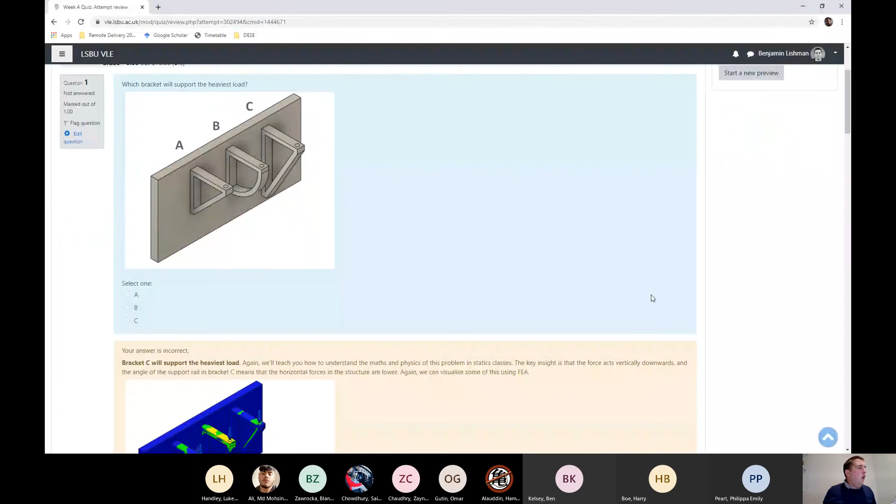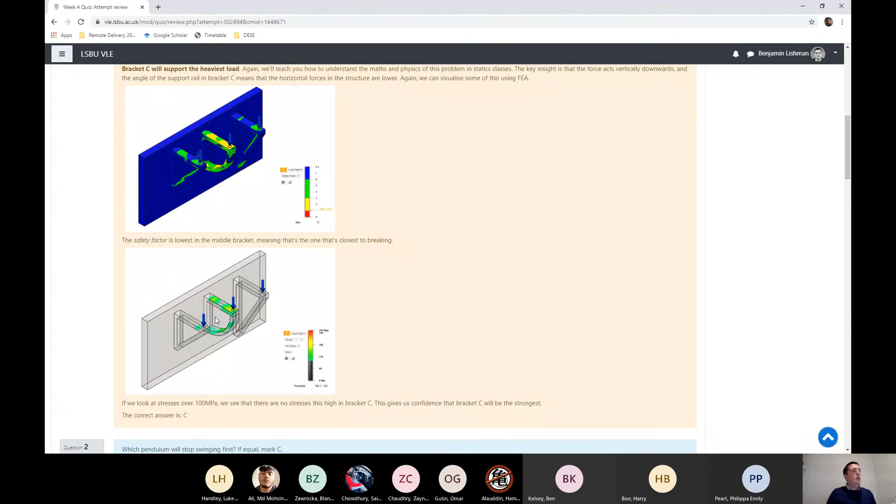I just wanted to flag with this example what we're looking at here. This box says stress and this box here says megapascals. The color bar on this plot is showing us the stress in this system. The kinds of things we've talked about in the lecture today feed through into fairly realistic problems like this, where we're looking at which of these things is going to break first, and it's by understanding stress and strain that we can understand those problems.

Pendulum problems can be intuitive but also kind of tricky. Usually the way to think about it is the longer the pendulum, the smaller the losses compared to the energy in the system. That takes some time to convince yourself of. One way is to imagine a really long pendulum and a really short pendulum, exaggerating the differences, to see that the short one will stop quickly because the losses are high compared to what's in the system, while the long pendulum will swing and swing for days.

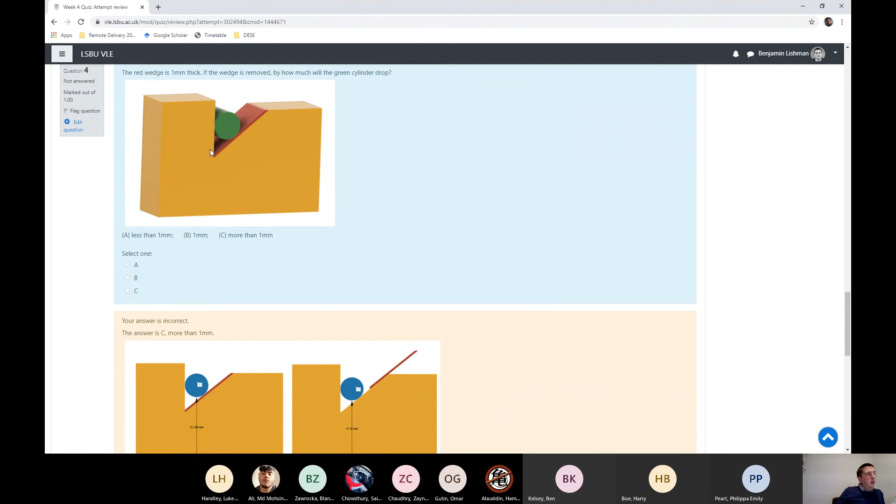Question 4 is something I hope people can already see, because it involves picturing different triangles, which is coming up in maths around now. The wedge is 1 millimeter across its length, and if you draw the correct triangle across its height, you'll see that means it's holding up the green tube by more than 1 millimeter vertically. Exaggerating the scale of things in your mind will help you picture that.

Question 5, as Philippa said, it might seem like one weight will pull the other up, but actually in this context neither weight will move, because they're the same. If you imagine cutting a slice in this rope and thinking about how much force you need to hold everything still, that force is W in both cases — that's the tension in the rope.

As always, those are brain teasers meant to get people thinking of lots of different ways of using physics in engineering. I hope they keep linking back to things we're talking about in this class, but really the important thing is just seeing that engineering involves visualizing physical systems in some way.